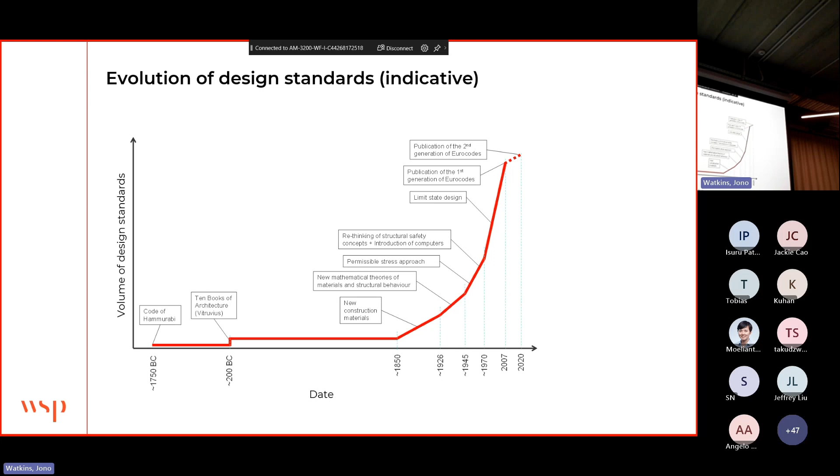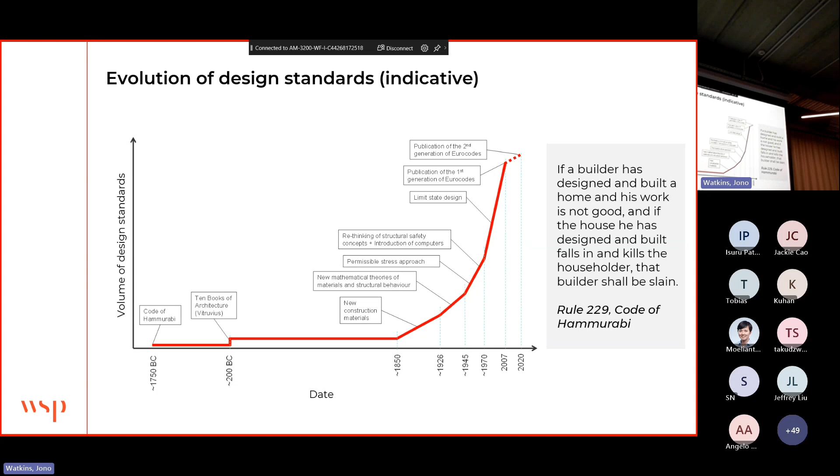In terms of increasing complexity, it's certainly the case. My colleague and friend Marion Angelina, when she was doing her doctorate, looked at design standards, and it's definitely the case that when you look back through history, the volume of standards has increased. No question that's happened. I always think it's instructive to go back in history and look at things. If we go back about 4,000 years, the original design standard, the Code of Hammurabi, stated: if a builder has designed and built a home and his work is not good, and if the house he has designed and built falls in and kills the householder, that builder shall be slain. For those of us in the standardization community, it's interesting that even 4,000 years ago, people were writing performance-based standards. And for those of you involved in contract negotiation, it made me smile that even back then they were using pain-gain contractual mechanisms, although in those days they focused more on the pain. But I'm not going to take too many examples from that far back.

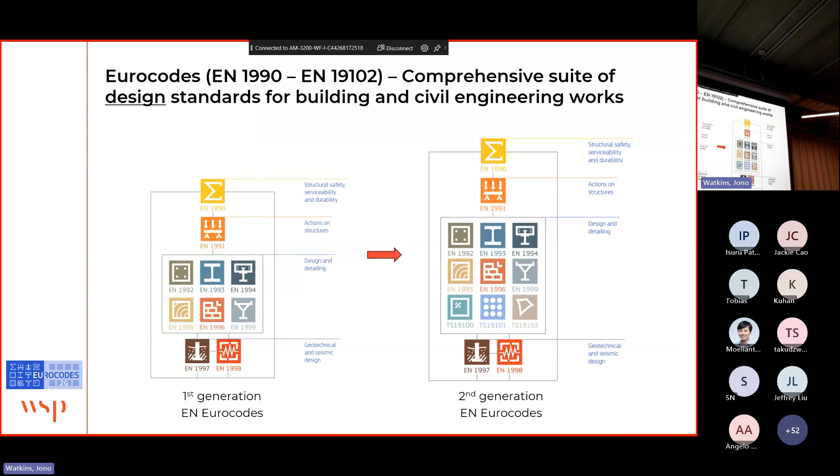I'm going to focus mostly today on their evolution. There's a really sizable program of activity happening in Europe to develop the second generation of the Eurocodes. It's probably worth doing a quick overview of how the Eurocodes work. The Eurocodes are the standards for design of buildings and civil engineering works across Europe, a single suite covering all facets of civil and structural design, including geotechnical design. There isn't a separate suite of standards for bridges and separate standards for buildings, it all sits within one integrated suite. For the last 10 years, we've been working really hard on developing the second generation of these standards, and by funding level, that's been the largest standardization program ever in European standardization history.

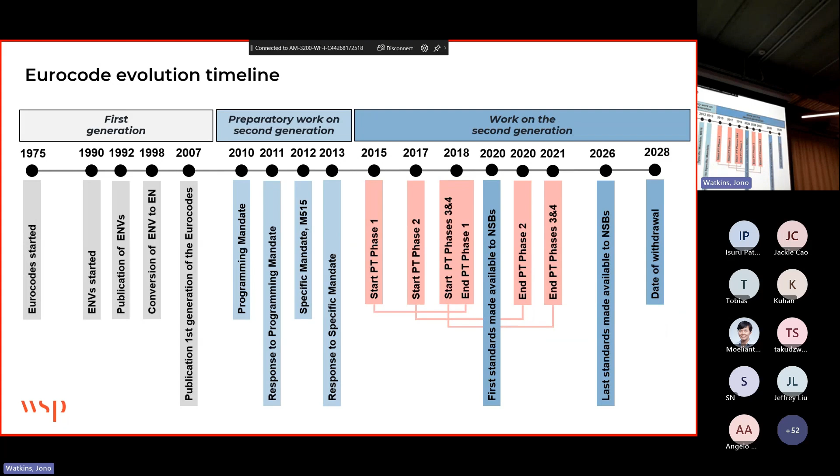As I'll come on to talk about later, there have been thousands and thousands of experts involved in this effort. But I wanted to mention right at the outset, I remember back in 2010, as we were doing some of the planning for this program, sitting in a meeting room overlooking the harbour in Helsinki, debating simplification.

So this topic, this concern - where should we place ourselves, what should our ambitions be, what's the right level of complexity in standards - was front and center of our minds as we embarked on this huge program of Eurocode evolution.

As John said, this is something I've spent a significant amount of time working on over the years. Hopefully some of the things I'll share with you today might challenge your thinking a little bit around standards and what we should be doing. I hope it's going to be worthwhile and interesting for you.

When you're going to listen to someone for a bit and hear their views, it's always interesting to know what their viewpoint is. So, as Johnny said, my day job is as head of civil engineering for WSP in the UK.

I lead a unit of about 750 staff. Very much my way of doing that is I spend at least 50 or 60% of my time working on projects, so I stay close to clients, I stay close to colleagues - that's very much the way I approach it.

I've been chair of TC250, the committee responsible for Eurocodes, since 2013. I was elected last year as Vice President of the Royal Academy of Engineering, a tremendous honour that gives real insights into engineering policy and strategy across the profession. I've had the visiting chair at Bath for about 15 years now, which gives me a sense of the challenges around engineering education and an opportunity to be involved in research.

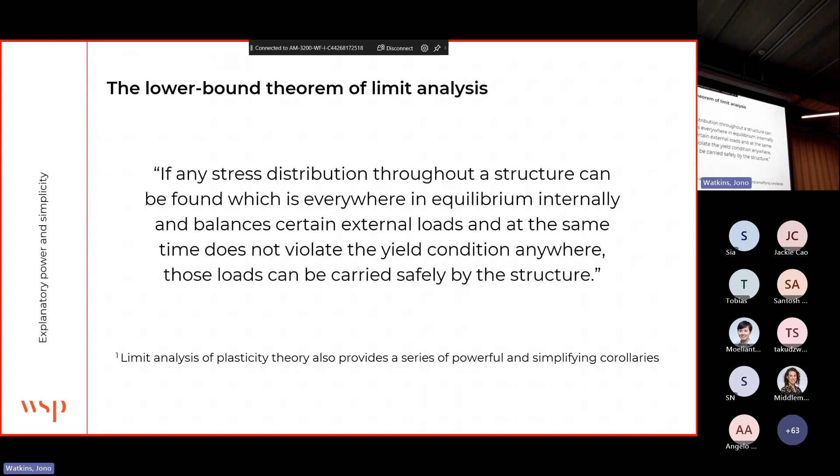There are four conditions behind this. It only holds if displacements are small, if materials are ductile, and then the third and fourth are kind of in the weeds. You need the yield surface of what you're looking at to be convex, and you need this thing called the normality condition to apply. But a lot of materials we look at, the third and fourth will apply. So focus on the first two: small displacements, ductile materials.

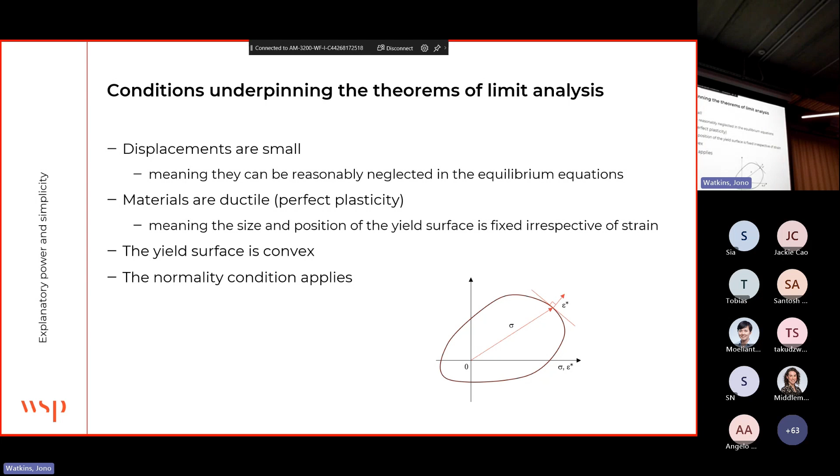It's interesting when you start scratching the surface of standards. So now we'll go back to the Eurocodes. You'll see in the second generation Eurocodes, the new ones, we say the effect of restrained, imposed deformations may be neglected at ultimate limit state. Tremendously simplifying statement. But you can kind of tell from the fact that I've left a colon there that there's a little more to come. So what else is he going to say?

What it's going to say is you can only do that if there's deformation capacity, ductility, and displacements are small. And if that isn't true, then it all gets more complicated. The point I want to make here is that if we were happy in all cases to prevent second-order effects and to use ductile materials, we wouldn't need the complexity that follows in Annex D and elsewhere in the standard.

We make a choice. We make a choice that says, actually, we want to use more brittle materials. And it's a trend in our sector. We're looking to use higher strength materials. Higher strength materials tend to be more brittle. You look out the window at some of the structural forms that get designed, they're more affected by second-order issues. So we're making a choice. If we want to use those more brittle materials, if we want to design structures that are more influenced by second-order effects, we need the tools in the toolbox to be able to deal with that. And those tools bring complexity.

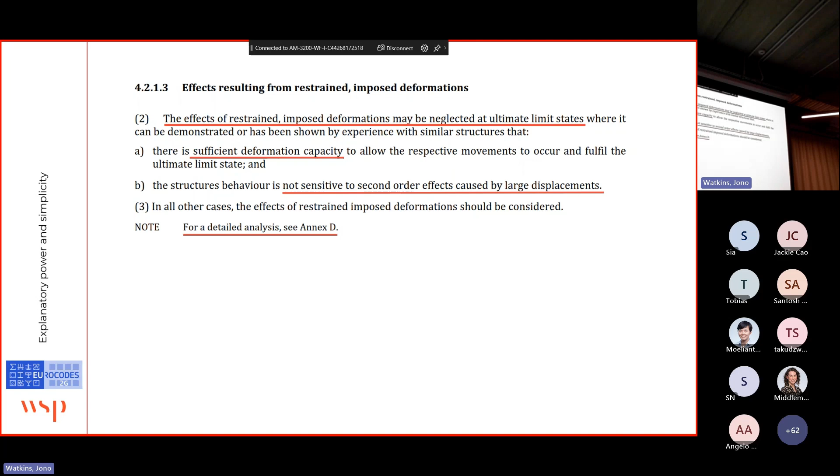The thing I pointed out to Peter, though, was that might be true in design, but a huge amount of our work these days is in assessing existing structures. And the Eurocodes are being extended to cover, at least in part, assessment of existing structures. When you're assessing existing structures, you don't have that choice. What you have to analyze is what you've got, and you probably don't have perfect information about it either. So in that situation, you haven't got that flexibility. You can't make that choice. You need the tools in the toolbox that enable you to do the analysis that's demanded by that structure.

Again, it's interesting for me around design standards and assessment standards, because I've been party to many conversations over the years where people have talked about or implied that assessment standards are like a little extension of the design standard. In my experience, that's completely wrong. Actually, the assessment standards are the general case, and the design standards are the specific case.

The thing is that in design, you get to choose your materials. You get to choose your construction tolerances. You get to choose your detailing. So it's a constrained problem. In assessment, it's not a constrained problem. In assessment, you just got what you've got, and you've got to have the tools to be able to analyze it.

Crucially in assessment, if you're assessing an existing structure, the value of doing that accurately is huge because it makes the difference between leaving a structure in service, extending its life, or having to deploy some kind of strengthening or replacement, which obviously has significant economic consequences, social consequences in terms of disruption, but crucially major carbon consequences. I do think that one of the best things we can do as bridge engineers to contribute to decarbonisation is to extend the life of the existing structures that we have. A really key contribution for us to make.

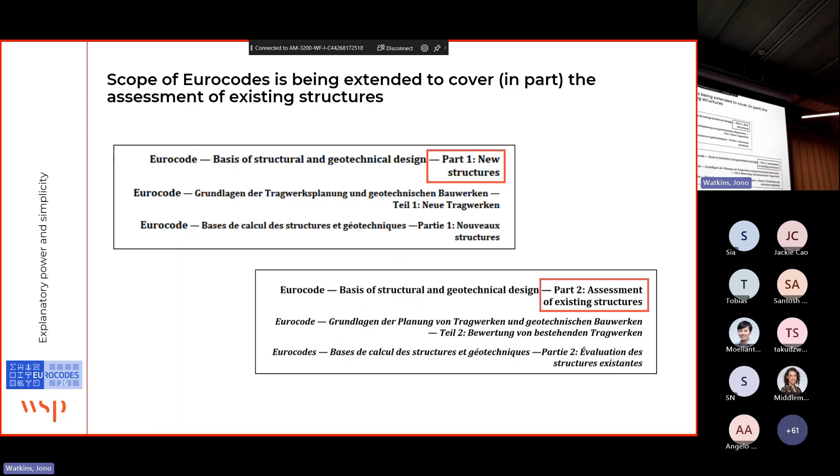So I guess I'm starting to unpack my thesis a little bit here. But that complexity is there for a reason. I'm going to go a little deeper into that. So now looking at EN 1992 and what's happened to Eurocode.

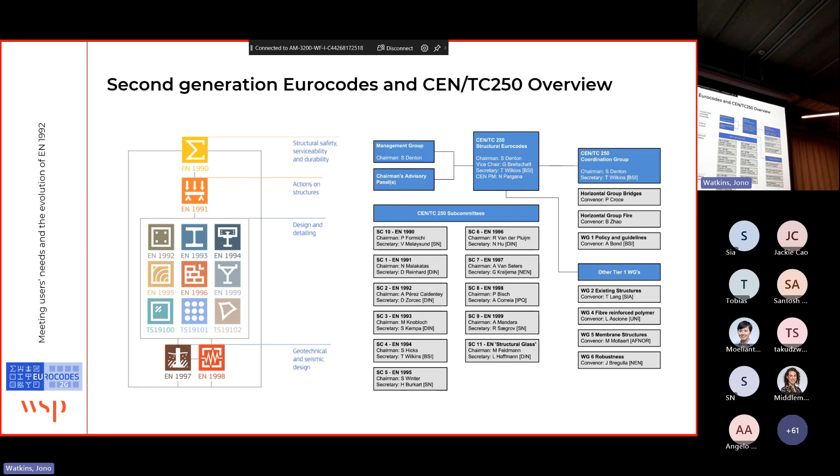So a little bit more on the program, because it gives you a sense of the richness and thoughtfulness that's gone behind this program. I've already mentioned the structure of the Eurocodes. This is the structure of the TC250 organization that's done all the work on the Eurocodes.

One of the other layers of complexity that's really important when thinking about the Eurocodes, and it's true of any standard, is that standards work as a suite, as a family. The design standards have to work in conjunction with the product standards and the execution standards, the construction specification standards. If you're looking at the buckling of a steel member, the load it will buckle at depends on how well it's been manufactured, its straightness, and how accurately it's installed, the construction tolerances. You have to put assumed tolerances into your design standards, and then specify those as requirements to be satisfied by your products and construction. These things all have to tie up, they all have to link up.

One of the other interesting things, from the perspective of developing the Eurocodes, is that they're implemented by 34 countries. So you've got to provide that layer of national adaptation to fit within the regulatory regimes across 34 different countries. We have that layer to accommodate as well.

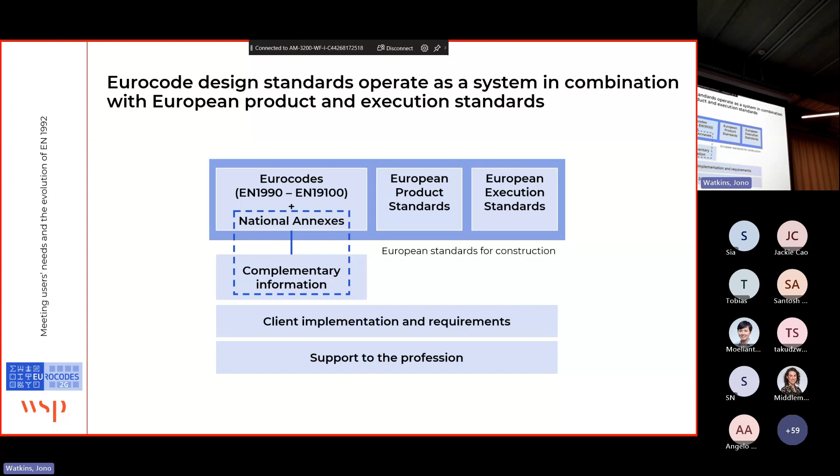In terms of the development of the second generation of the Eurocodes, the European Commission recognizes the importance of this suite of standards. I've already indicated that by the fact they invested more money in developing the second generation Eurocodes than in any previous standardization program, by a factor of about 5. The Commission set out and shared with us their aspirations for the second generation, the strategic direction they wanted them to go in. Importantly, in those days we used to call them mandates; these days they're called standardization requests, but that unlocks a funding opportunity as well. So this shaped the strategic direction.

We had about 1,000 engineers across Europe work on the response to this, putting together a whole program for how we're going to respond to it. So that was part of the picture.

The other thing we did was go out to all 34 countries, for each one of the 59 Eurocode parts, and say give us your feedback clause by clause, what you like, what you don't like, how can this be better. We collected thousands and thousands of comments, each one catalogued and responded to, and then brought that together to shape the evolution of the Eurocodes.

Just to give you a flavour of the scale of this endeavour, last time I counted, a couple of months back, we had 129 active subcommittees, working groups and task groups working on this programme. I mentioned that interface with the product standards - we had 46 active liaisons across to other technical committees. We used most of that funding from the European Commission to set up 76 funded international project teams to work on different facets of the suite.

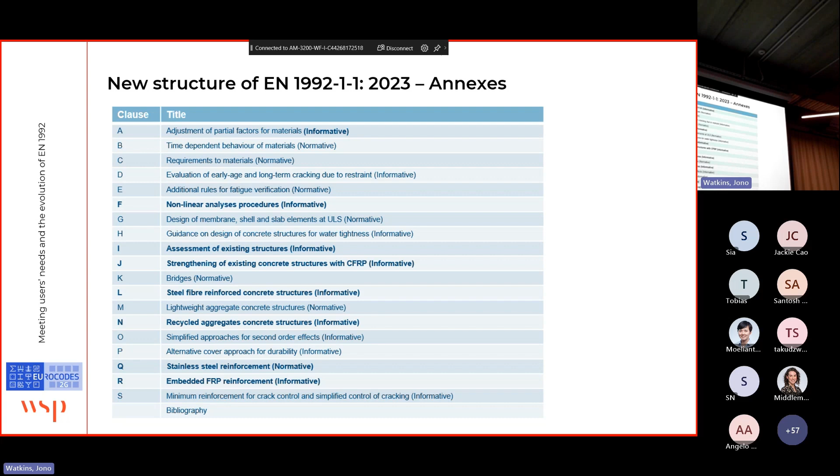So is it simpler or more complicated to put that material within the standard or have it separate? I think what I suggest is that actually it is easier to have it within the standard, although it does make the standard bigger. So let's keep digging into this a little further.

So we talked earlier about that critical societal challenge around sustainability. Absolutely vital. Also big challenges in terms of economic costs, carbon costs, critical for us as well.

So what have we put in the second generation Eurocode to help with that? A host of things to enable us when we do designs to use materials more efficiently. So unlocking opportunities for more complex and sophisticated means of analysis, including opportunities to adjust partial factors, safety factors, where we've got better information, which means our uncertainties are reduced, and therefore we can live with reduced partial factors.

Or we know that confined concrete is both stronger and has greater deformation capacity than if it's not confined. So we've included within the second generation Eurocode some clauses that enable you to take advantage of that. You need to have them - well, you could argue no, many standards don't. Seismic standards will, but many other standards don't. But it enables us to design structures more efficiently, so there's a strong argument to say actually it's the right thing to do.

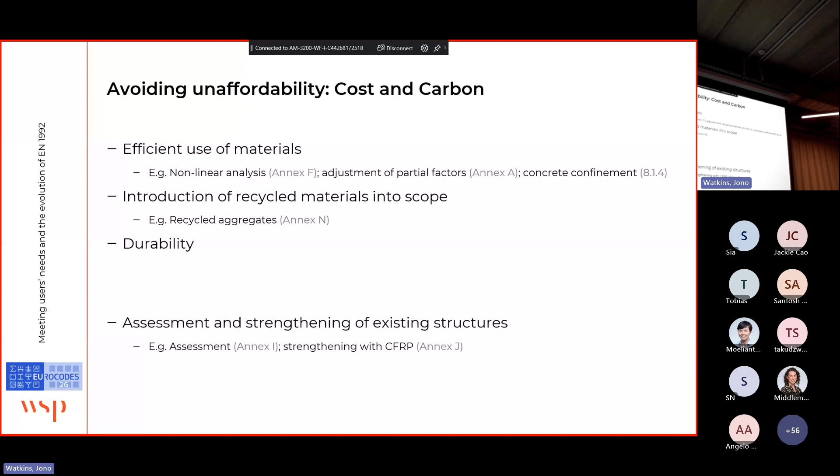Let's go dig into one of them, okay? So that second order analysis one comes back to the point you made earlier. Go to another place in the Eurocode, where it's saying that when you're doing your analysis to calculate your action effects, that you can do a linear elastic analysis.

You can use uncracked cross sections - massively simplifying and convenient to be able to use uncracked cross sections, because if you don't, then you need to know how much reinforcement you've got, and you don't know that because you haven't designed it yet. So being able to use uncracked sections is really, really helpful and convenient.

But of course, that doesn't apply if we need to deal with second order analysis. And if we're doing second order analysis, then we have to take account of the effects of cracking, non-linear material properties, creep, and all those 23 clauses of pain you have to worry about. That's complexity that we bring in if we're doing a design where this becomes relevant.

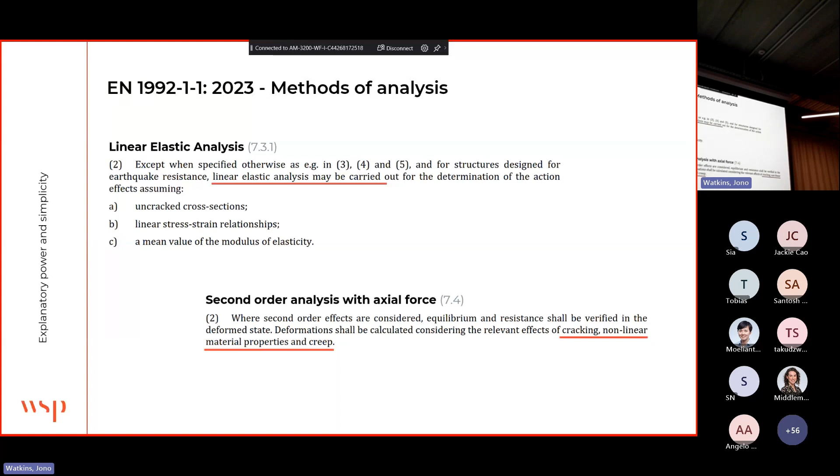So if I get back to that quote at the start, like life in general, our codes seem to get more and more complicated. I'm sure when I put that up and you looked at it, you probably all kind of think about complexity in a pejorative sense. Complexity is a bad thing.

Is it? The point that I want to challenge people about is, don't we need those tools in the toolbox? As a profession, shouldn't we see our ability to deal with complex issues not as a point of shame, but as a badge of honor? It's a strength of us as a profession that we can deal with complexity.

We shouldn't be looking at it that way. It really frustrates me if I'm at a conference and an academic presents some beautiful, elegant, mechanically sound theory, and then at the end they say, but of course practitioners can't understand all of that, so here's a really simplified and crude approach which loses all the clarity behind it. That really frustrates me. We don't need to do that.

So I think we have to challenge ourselves and actually say, no, we shouldn't be afraid of complexity. We need it in our standards. We need those tools in the toolbox, because when we're dealing with some of the complex things we deal with, we need to have these tools at our disposal. We shouldn't worry about it when we see standards getting longer, or giving us options to do things that are more complicated. We should see that positively.

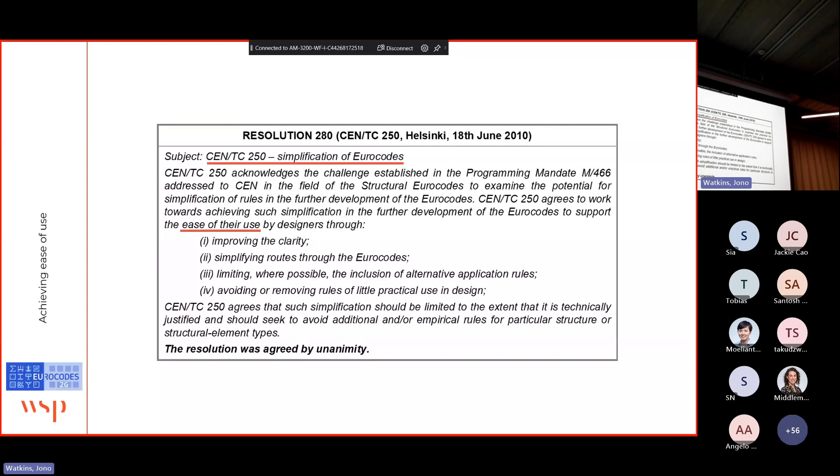When we embarked on this huge program, we set ourselves two overarching objectives. The first is that we should enhance ease of use. The second was to achieve exemplary levels of international consensus. Now, this exemplary levels of international consensus is a talk in its own right. Trying to work with and corral 34 countries to arrive at a consensus position is a huge privilege, and it has its moments. But we're not going to focus on that now. Tonight, we're going to focus on the enhanced ease of use side of things.

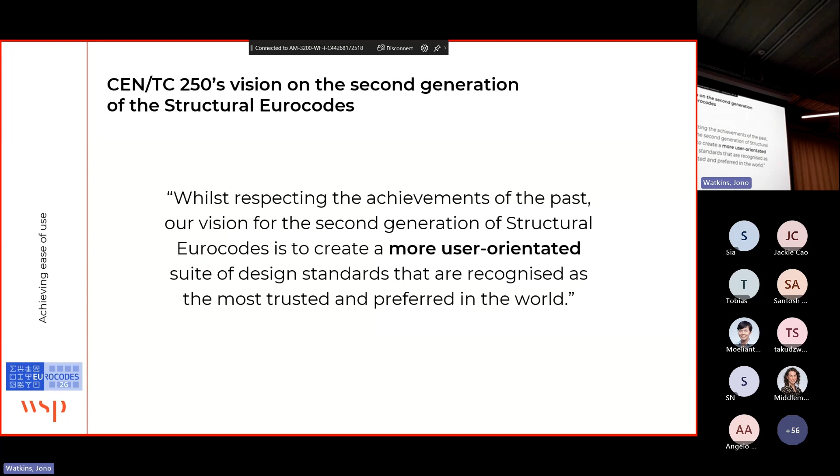So one of the first things I did when I took over as chair of TC250 was establish an international panel of 16 experts. We did a lot of wider consultation to understand what ease of use meant to us, and we developed a position paper. It set out a vision, and importantly, it set out 5 pillars that we were going to lead this through. All 34 countries came in support of this approach.

It has really important implications because by defining it as competent civil, structural, and geotechnical engineers—typically qualified professionals able to work independently in relevant fields—which you all know from working, typically around 4 or 5 years in, often around chartership, that's the point where you start feeling confident to work independently. So that's the target audience.

But it says something really important about how you draft clauses. You're not drafting clauses for anyone—you're drafting clauses assuming a level of competence. It's really important, because when you're interpreting a standard, since standards are written for competent engineers, you can't just arbitrarily take a sequence of words and decide to interpret it in whichever way happens to be linguistically favorable to you. Because you're a competent engineer, you need to understand the underlying structural mechanics and interpret it properly.

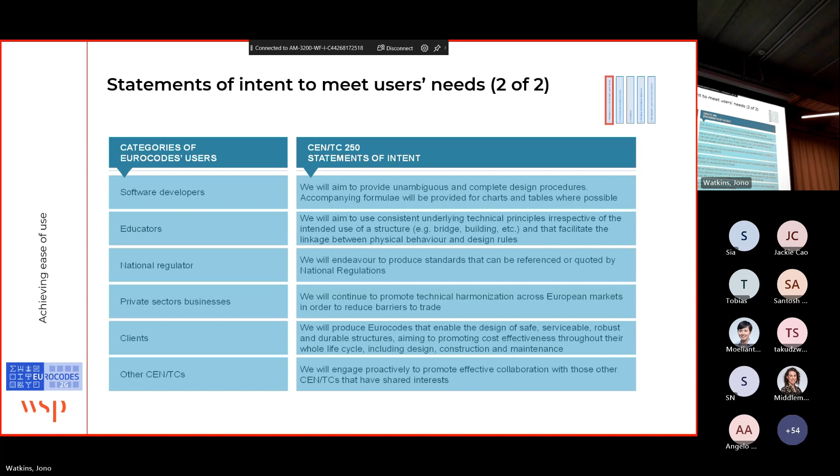Regulators—really interesting—34 countries, different regulations, getting that to fit together. So I talked about expert specialists.

When you're drafting standards, there are very specific things you can do to support this. This isn't just an aspiration—these are specific things you can do, and one of the key things in this space is the way in which you express clauses. So in the Eurocodes, we use 3 different verb forms: shall is a requirement, should is a recommendation, may is a permission.

The shalls you have to do. The shoulds—well, you can do something alternative provided it's technically justifiable to do so. So one of the things we've sought to do is not have loads and loads of shall clauses, and actually migrate some of those into should clauses, and some into may clauses, which gives experts greater freedom to apply their expertise.

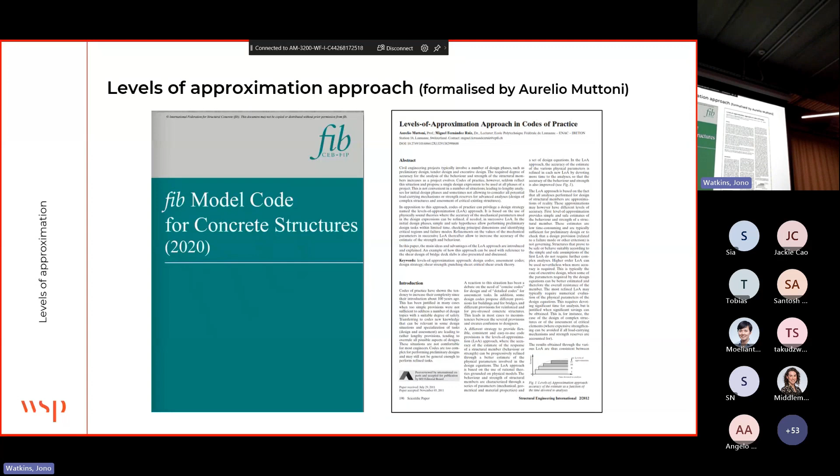The next thing, again looking forward, and this isn't something I invented—it's common within standards that you have simplified approaches and more sophisticated approaches. But what we find in some standards now, in the FIB model code, and this was formalized by a friend, Aurelio Muttoni in Switzerland, is the notion of levels of approximation: that within our standards, we can define different levels of approximation, methods with different levels of approximation.

The concept being that as we use more complex methods, yes, they will take more time to do, but we will get greater accuracy of results. And again, if you're dealing with existing structures, the point Aurelio is making in this paper is that if all you do is use the simplified methods, you pay for it with much more extensive strengthening work. Then as you progress through the levels of approximation, you increase your spend on engineering design, but you reduce your spend on strengthening the structure.

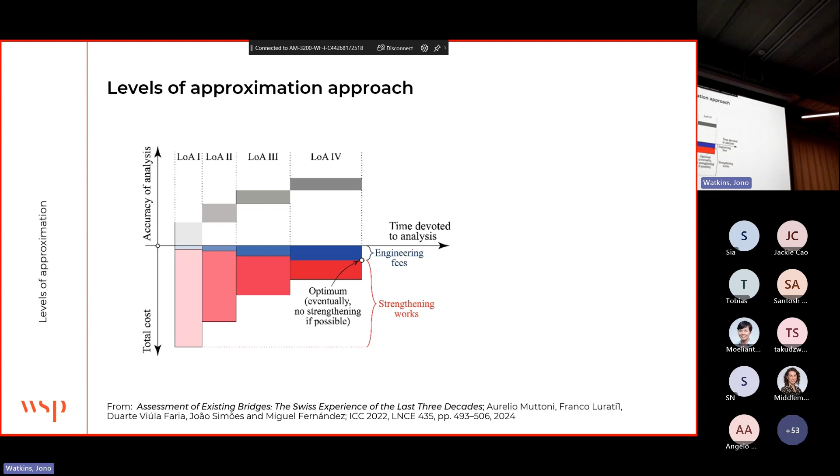And what I really like about this way of thinking is this idea that we should be putting much more transparency into our standards, in terms of these different levels of complexity, different levels of sophistication, different tools available to us. And as someone who spends time negotiating contracts with clients, if you've got this transparently set out in the standard, it's easier to define the scope of works.

Also, in the ideal case, you want mechanically consistent models with different levels of refinement, so you don't have the problem we had with the first generation in places, and which happens in many other standards around the world, where you have a simplified method and a more complex general method, and sometimes the simplified method gives you a better result. It should never really be like that - if you're going to do the work, you should get a benefit from it.

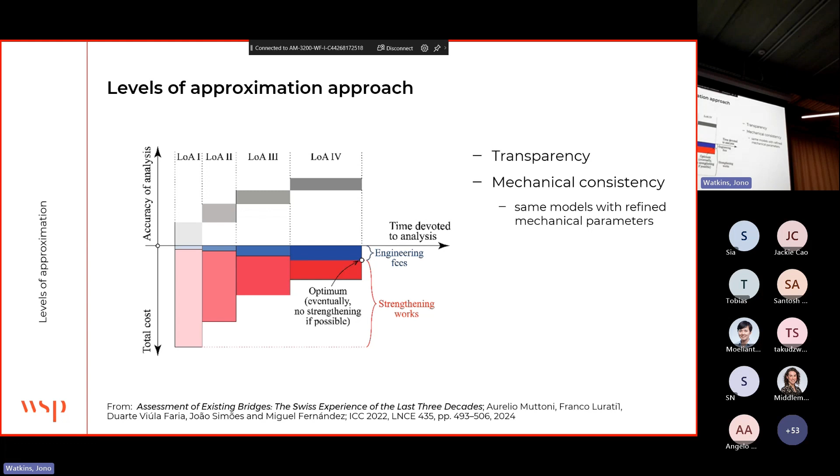That's nice. There's an interesting question about boundary conditions and something else we'll dig into, but I know we're getting close to time, so I'm going to wrap up. There are two things - well, a third one, and I think it's one of the most important ones.

I love libraries and I love working in libraries. As John heard me say yesterday, the reason I love working in libraries is if I look up, I see all of those books, and it reminds me that whatever issue I'm thinking about, someone far smarter than me has probably spent much longer thinking about it than I'll ever have the opportunity to.

And with a bit of luck, they've shared some of that wisdom in a book. But that's not the future of standards. That's not how we work. That's what our offices look like these days - the WSP ones tend to have fewer plants, don't they? But other than that, that's kind of how it works these days.

Earlier, I talked about page counts. I kind of leaned into that space of thinking about things in a paper-based way - okay, maybe it's a PDF - but I was thinking in those terms. As I was traveling over, I did a little search on how many pages there are on the internet. There are billions and billions of pages on the internet. When was the last time you heard someone say, 'Oh, I used to really like the internet, but boy, it's got so long'? No, that's not the issue.

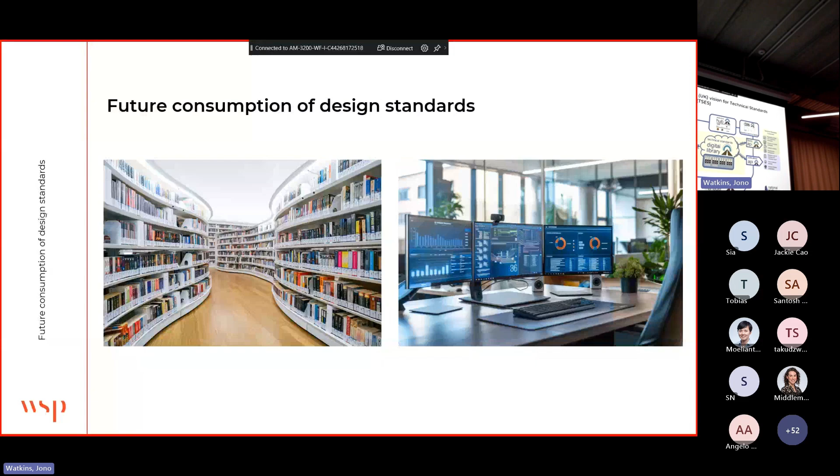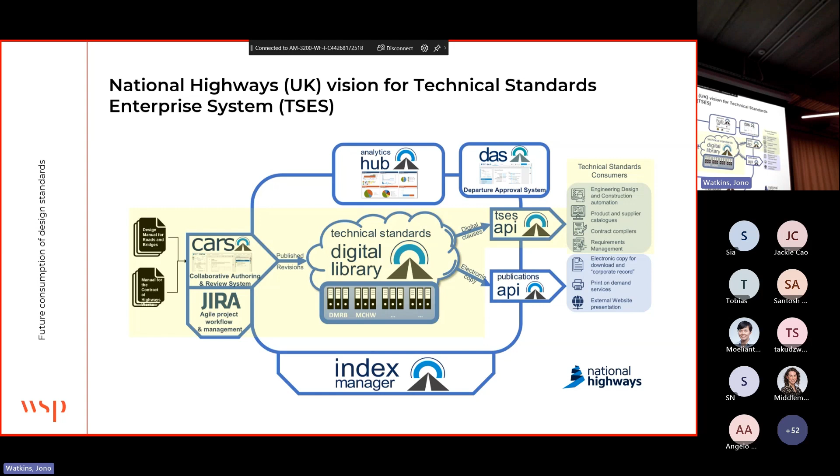The authoring platform includes automatic checking of compliance to the drafting rules as you go.

It also enables all of the commenting, so when you send the documents for review, all of the comments come into the system. When you're authoring, you have to provide background to every clause.

That's within the system, because sometimes the background to the clauses is quite weak. It's kind of a confession on standards writers - sometimes we haven't a clue. You're sitting there thinking, well, we've got to put something. So the best we can come up with is what five people in the room came up with at that point in time. Sometimes that's what happens.

Sometimes what also happens is once you've done that, people using the standard assume that you knew the answer - that there were 10 PhDs who had come up with the fact it was 3. Sometimes it's just the best you could come up with at that point in time.

It's really helpful to write that down. Not necessarily for public consumption, but it's really helpful if you're looking at a departure to know what the background was to these things.

And doing this, National Highways got some real benefits: half the length of the standards, reduced the time to produce them by 80%. The best they'd done in any year previously was to update 30 standards. In one year, we did 272.

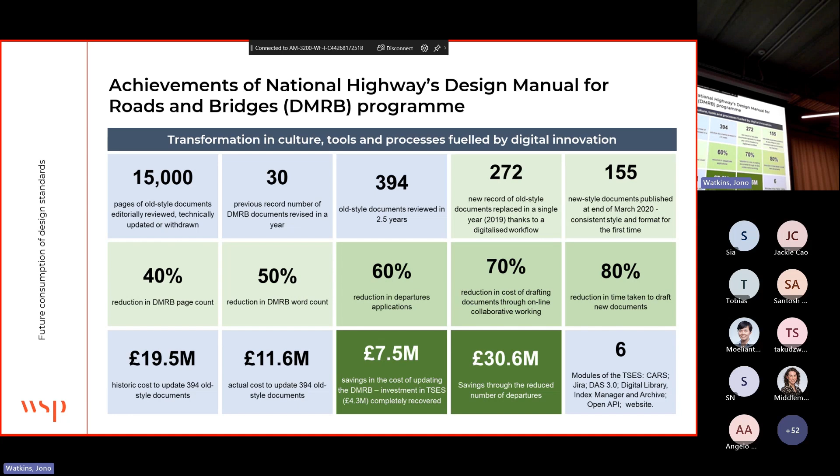So some brief conclusions, and hopefully I haven't gone too much over time - these are really short. My point is that there's kind of an orthodoxy out there, I hear it said a lot: we want simple standards. Yeah, we have to recognize what the cost of that is.

Simple standards inhibit us, and they have unaffordable sustainability impacts. For design, they'll lead to inefficient use of materials. For assessment, they'll lead to situations where we have to strengthen structures that we might not need to.

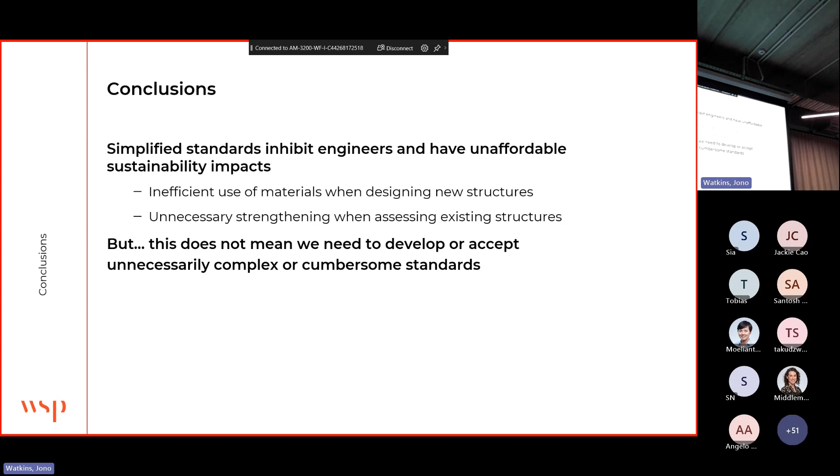Simple standards come with a price. But as I was saying earlier, it doesn't mean our standards need to be unnecessarily complicated. It doesn't mean we want cumbersome standards. So how do we achieve that?

Firstly, that focus on ease of use - not simplification, not dumbing down, ease of use. The second is to think about how we achieve transparency.

Between putting into the toolbox different levels of sophistication, and we provide transparency in that through maybe a levels-of-approximation type approach. Probably the most important one, to be honest - and this disappoints me - is that National Highways was able to make so much progress, but the standardization community around the world is not. People are working on it, ICE is working on it, CEN's working on it, but they're not making the progress that National Highways made.

Because the future development and consumption of standards will be digital, and that's where we need to get to. It transforms their use - it means we can integrate them into workflows, we can use them as part of a knowledge ecosystem.

So when you're reading that clause and thinking, I'm not quite sure what it means, shouldn't we be able to just click on it and go through to that YouTube video that explains the background to that clause, or find that sample calculation? That's the future. That's the future.

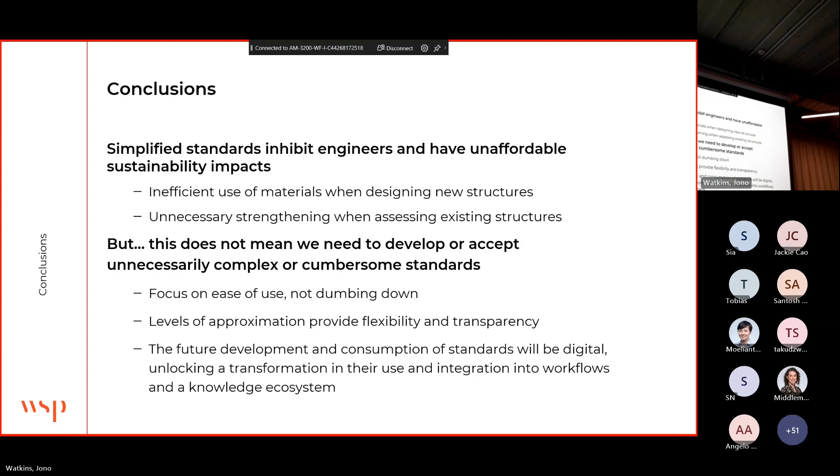That's me. Thank you very much.

Thanks, Jono. I look forward to the future of YouTube videos that explain everything.